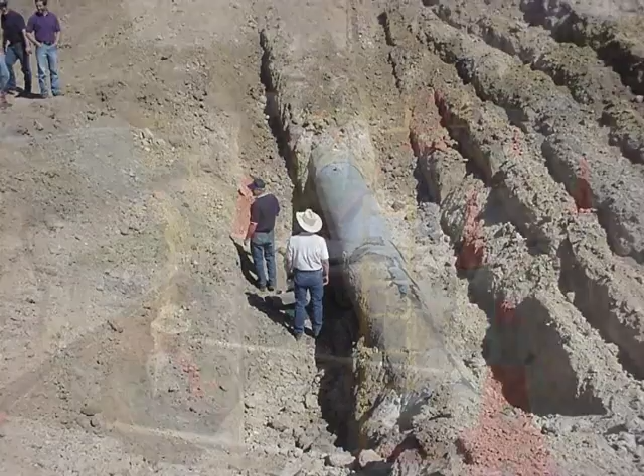External corrosion is the second leading threat to gas transmission pipeline integrity. The Code of Federal Regulations, Title 49, Part 192, contains provisions for ensuring that buried pipelines are protected against corrosion. These criteria have worked well over the years, as evidenced by the very low rate of incidents caused by corrosion.

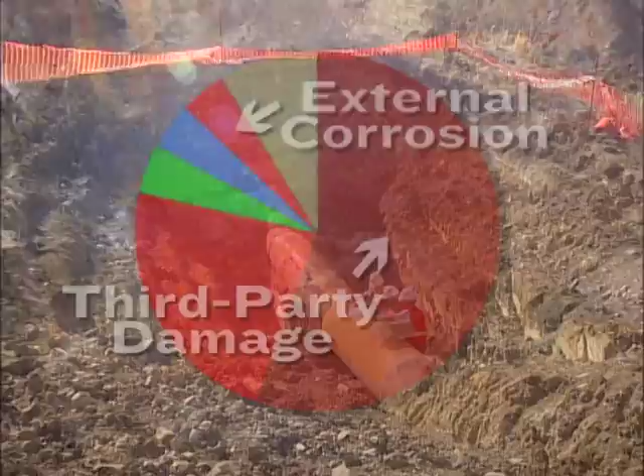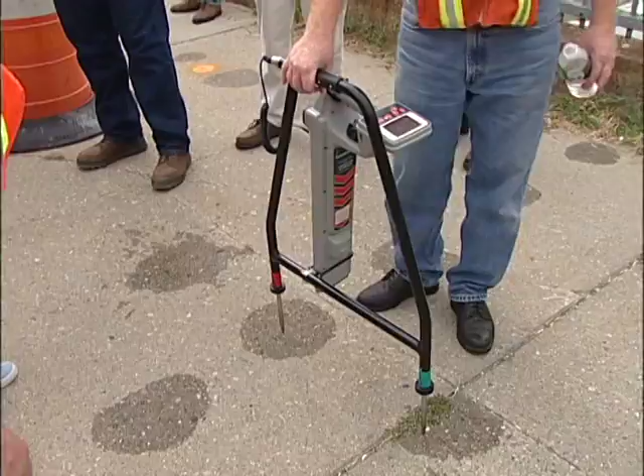In the early 80s, many pipeline operators began supplementing the minimum code-required corrosion control monitoring provisions with additional external corrosion testing, such as close interval survey. Additional corrosion testing methods, such as voltage gradient and attenuation survey techniques, were developed in the 80s and 90s.

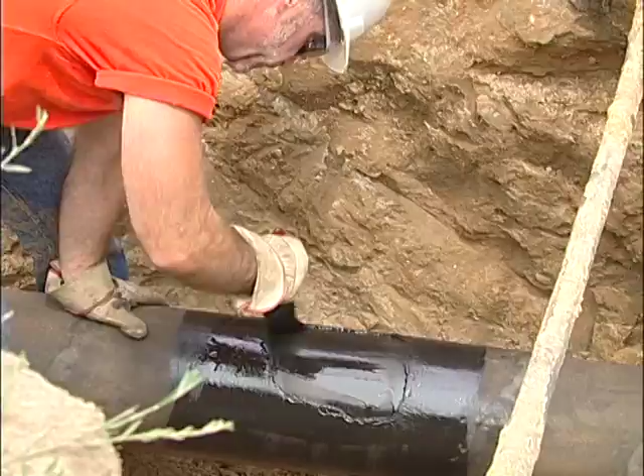Since external corrosion protection of a buried pipeline is primarily dependent on a good coating as the first line of defense and cathodic protection as the second line of defense, most of the testing was designed to locate coating flaws and determine the adequacy of cathodic protection.

Recently, these corrosion testing methods were integrated into a comprehensive engineering-based process called External Corrosion Direct Assessment, or ECDA. The ECDA process is comprised of 4 key steps: pre-assessment, indirect inspection, direct examination, and post-assessment. Industry experts worked together to develop the process.

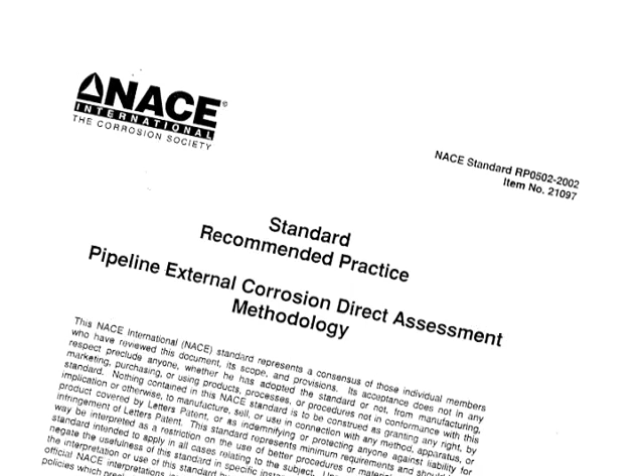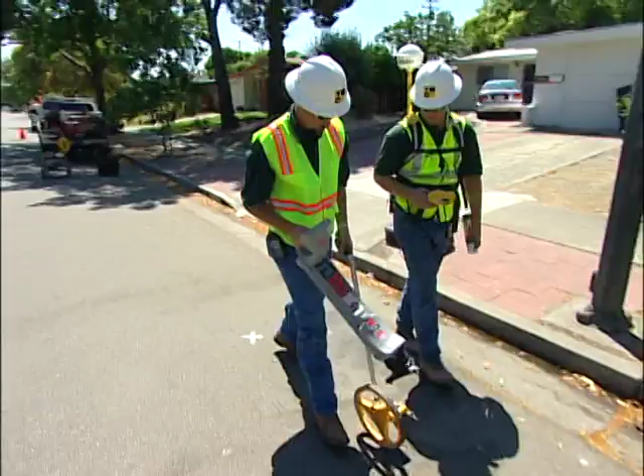The National Association of Corrosion Engineers, or NACE, led this charge and established RP 0502 as the recommended practice for performing ECDA. The process involves using engineering analysis, indirect and direct examination, and post-assessment evaluation and process improvement to investigate and confirm the integrity of the pipeline.

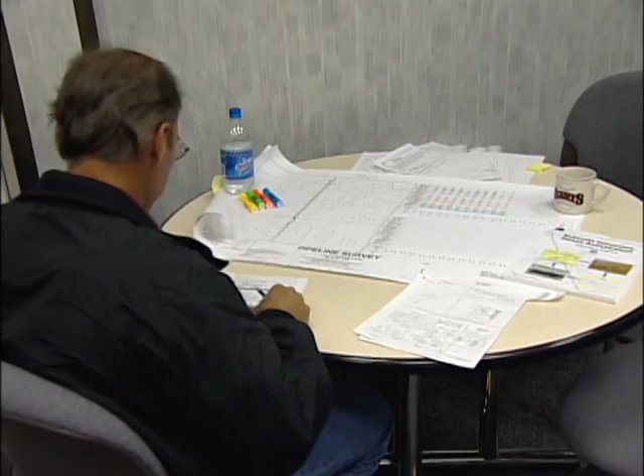In the pre-assessment step, historic and current data are collected and evaluated to determine if ECDA is feasible. Once feasibility is established, appropriate indirect inspection methods are selected and ECDA study regions are defined. Data that are researched and collected include pipe-related specifications, construction-related information, soils and environmental information, corrosion control data, and operational data. It is extremely important that all efforts are exhausted to gather all available data for the pipeline.

Some companies have advanced GIS and work management systems that electronically house many of the data elements. Other companies rely on paper mapping systems, inspection reports, and maintenance records as a primary source for the data. And don't forget the ever-important field visit and interview of the people that have been primarily responsible for the maintenance and operations of the pipeline. Many times there is no replacement for first-hand field knowledge of the pipeline and its history.

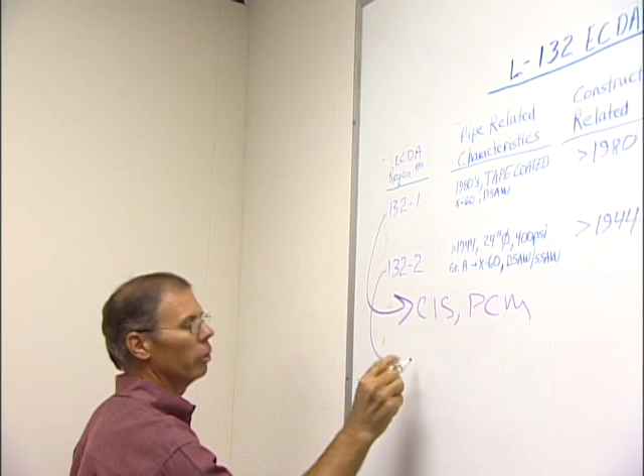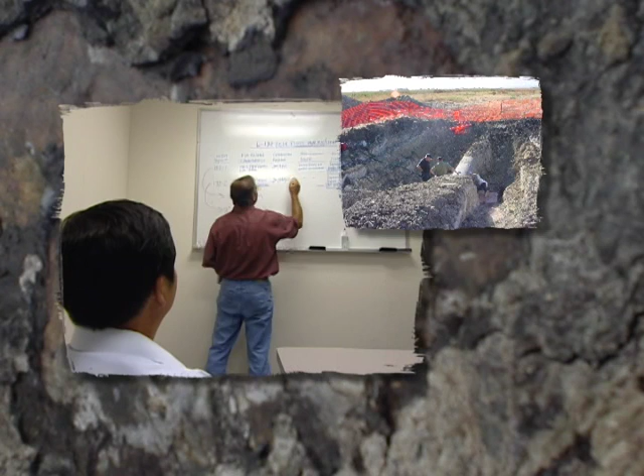After feasibility is established and indirect examination methods are selected, ECDA regions are established. Regions are areas of the pipeline that are expected to have similar past corrosion histories and future corrosion conditions. Pipeline segments put into the same region can be tested and evaluated as a single study area, even though they are not physically contiguous. An example of 2 different regions could be a 50-year-old asphalt-coated line versus a 5-year-old tape-coated line in the same environment.

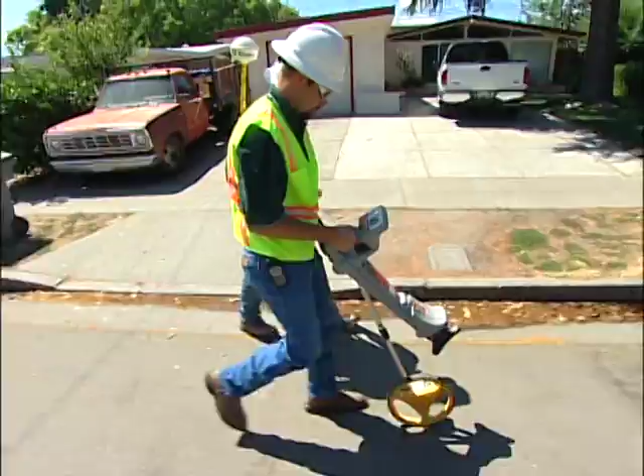The indirect inspection step involves performing the above-ground tests to identify the location of coating flaws or coating degradation, determine the adequacy of cathodic protection, and determine the corrosivity of the environment around the pipeline. Other information, such as pipe depth, may also be gathered if deemed appropriate. A minimum of 2 indirect inspection tools that complement one another are used over the entire ECDA region.

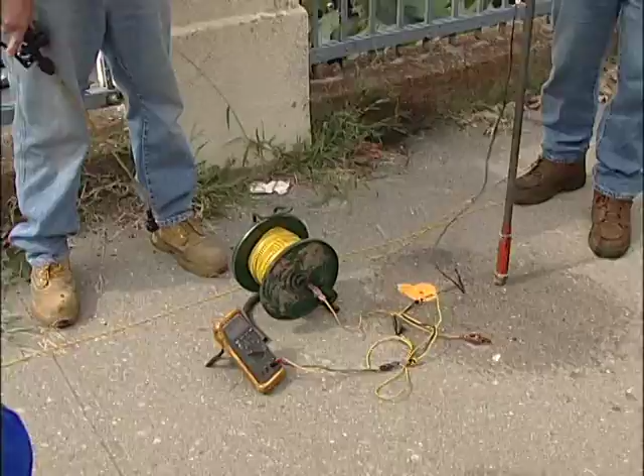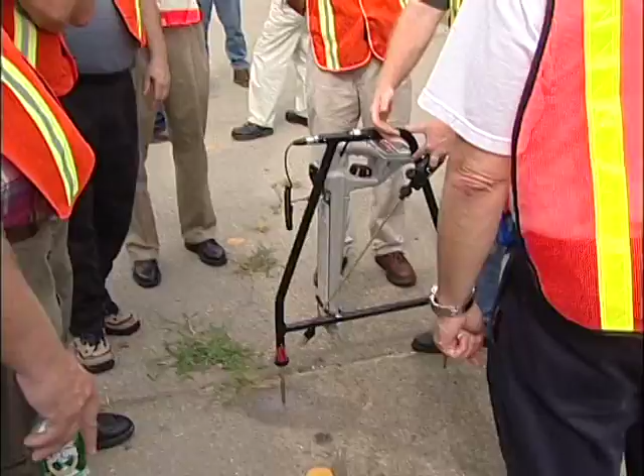Examples of test methods that are designed to detect coating flaws and degradation include the Pipeline Current Mapper, or PCM, the Direct Current Voltage Gradient Technique, or DCVG, and the Alternating Current Voltage Gradient Technique, or ACVG. The PCM determines the condition of the coating by looking for attenuation characteristics of an externally applied low-voltage AC signal on the pipeline. The PCM is also used to accurately mark and locate the pipeline.

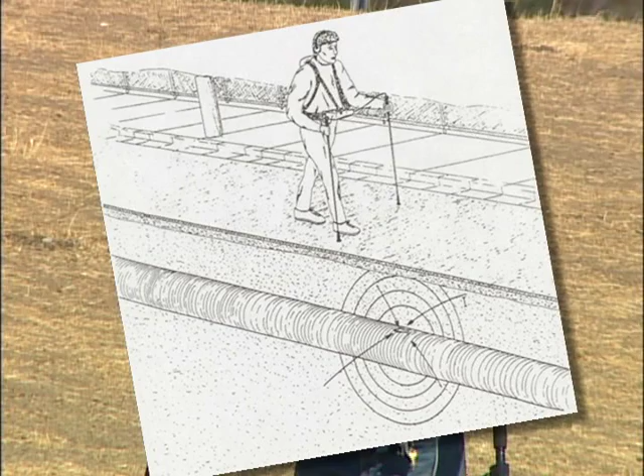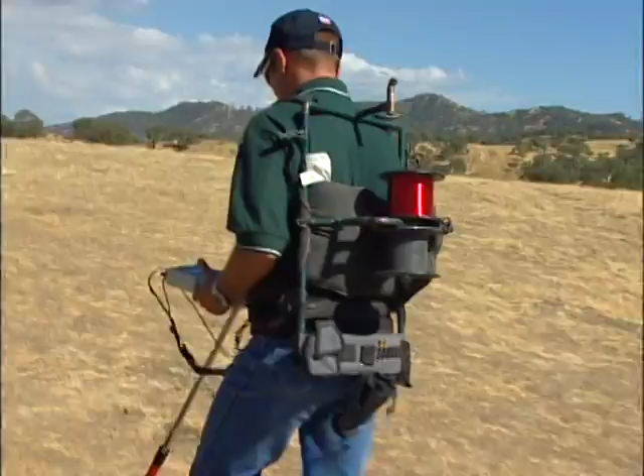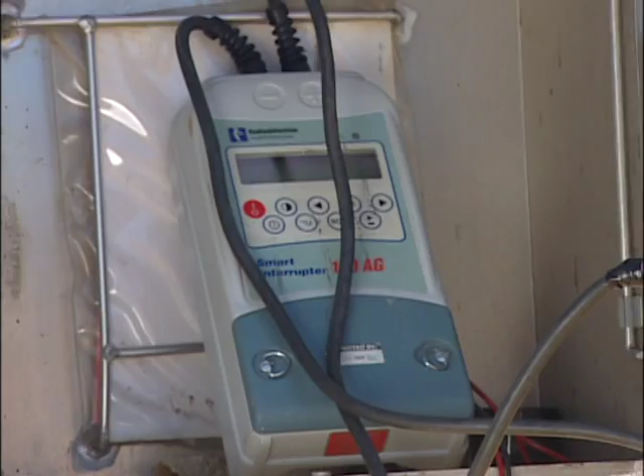Both the DCVG and the ACVG techniques detect coating faults by tracking voltage gradients created by CP current accumulating at the pipe surface at coating anomalies. To determine the level of cathodic protection, the Close Interval Pipe-to-Soil Potential Survey Technique, or CIS, is used. CIS is accomplished by measuring pipe-to-soil voltages, or potentials, at close intervals along the pipeline. On rectified systems, the testing is performed while synchronously interrupting the CP current sources.

The corrosivity of the soil around the pipeline can be determined using other techniques, such as the Wenner 4-pin method. To ensure that the data collected in the field can be accurately located for subsequent evaluation and potential excavation, many companies use Global Positioning System equipment, GPS, with sub-meter accuracy.

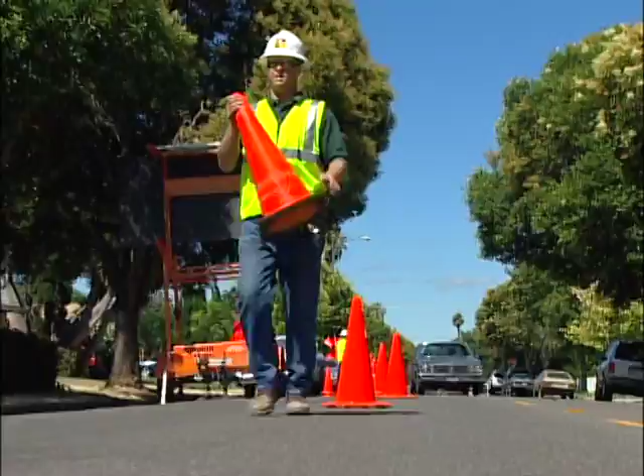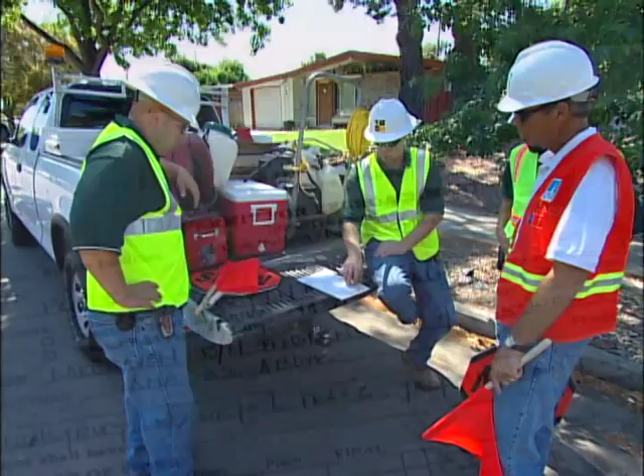For a pipeline that is buried in an unimproved right-of-way, the testing can be relatively easy to accomplish. However, growth has closed in on our pipelines, and testing pipelines that are located in city streets is more complicated. For example, performing CIS in city streets may require traffic control and drilling small holes in the pavement to establish soil contact. Local public agencies have comprehensive permitting requirements for this kind of work.

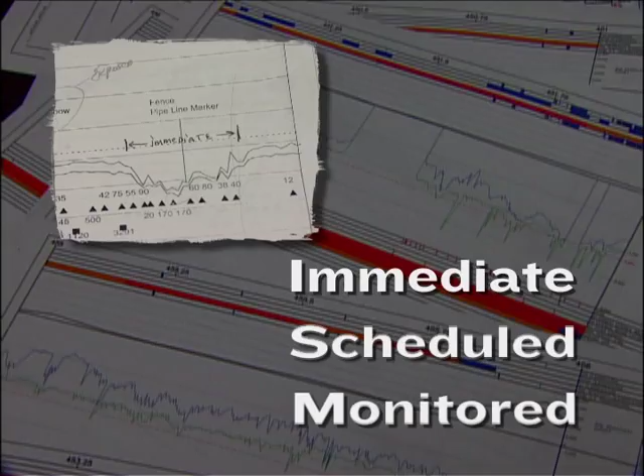Once the data is collected, potential deficiencies are classified as either a severe, moderate, or minor indication of a condition. The data is then integrated together with all the data collected, and priorities are established for direct examination. Indications are prioritized as either immediate, scheduled, or monitored. Immediate indications represent conditions where corrosion may be present. All immediate indications require direct examination.

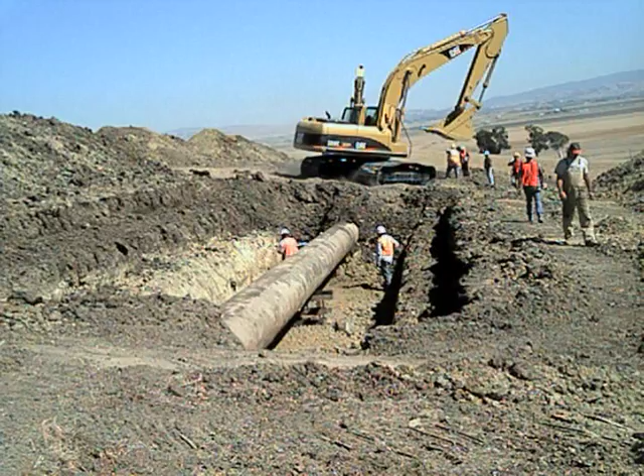Scheduled indications are of lesser concern, however, could still represent conditions where corrosion may be present or may occur at some point in the future. As a minimum, one scheduled indication must be directly examined. Monitored indications are those that have the lowest likelihood of experiencing corrosion activity and are monitored for review during future assessments.

The direct examination step involves performing the prescribed amount of direct examinations of the pipeline, documenting the condition of the coating and the pipe steel, performing any required remaining strength calculations, making any necessary repairs to the coating or the pipe, and performing a root cause analysis of the findings. Once this step is completed, the initial prioritization of the indications can be adjusted appropriately, and all actions required to complete the verification of the pipeline integrity can be established.

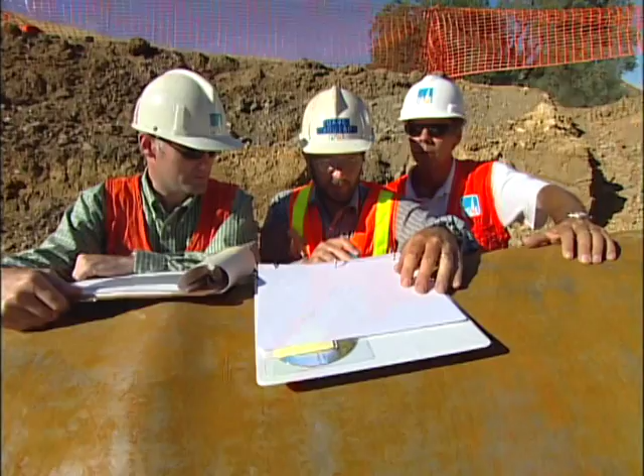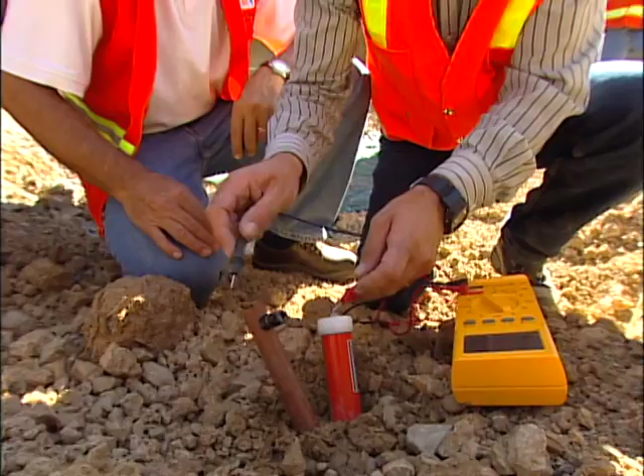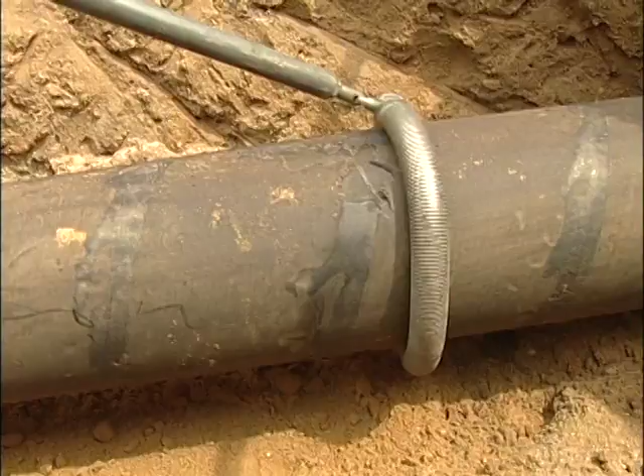When directly examining the pipe, a comprehensive evaluation of the as-found conditions is performed. There are many test methods that can be used to assist in the examination, depending on the level of coating quality and pipe integrity found. Here are some examples of the tests that can be performed. Soil analysis, resistivity, and soil pH testing, pH testing of any liquid underneath the coating, complete coating characterization, including using a high-voltage coating flaw detector and testing the coating thickness and adhesion strength, performing pipe-to-soil potential reads at the pipe depth,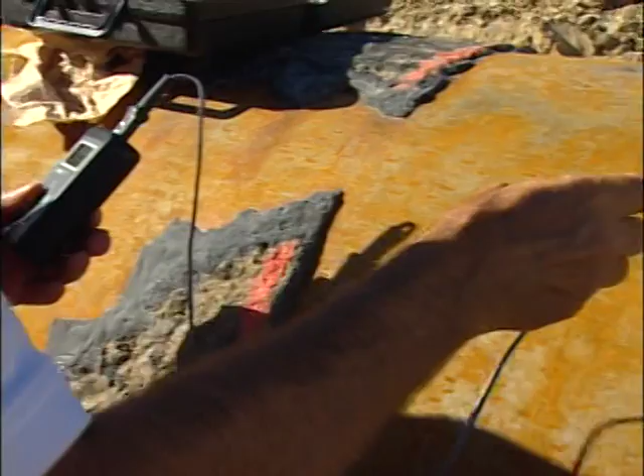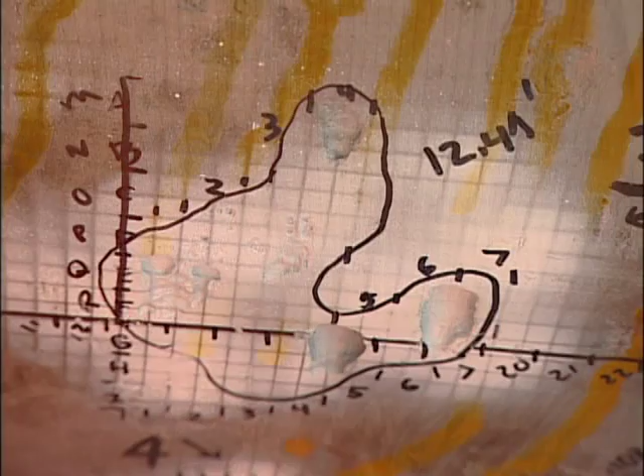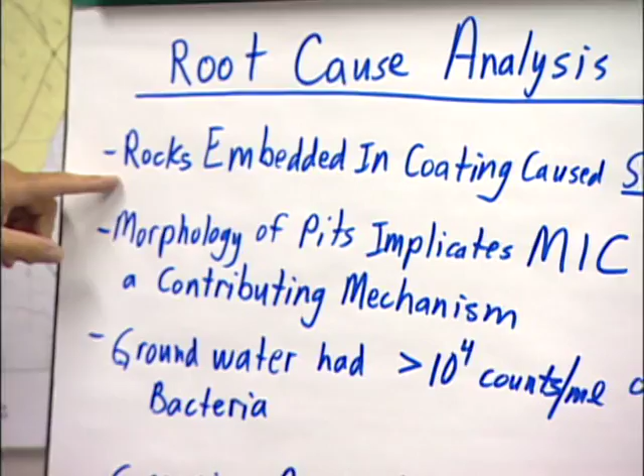analyzing any corrosion products found, including testing for microbiological influence, testing the pipe using magnetic particle testing, ultrasonic testing, and possibly even radiographic testing. If corrosion is found, detailed maps of the corroded area are made to assist in remaining strength calculations. Once all the as-found data are collected and evaluated, the results are combined with other pre-assessment and indirect inspection data to help the engineer understand the root cause of any conditions or integrity concerns that are present. The root cause analysis helps to solidify the past conditions the pipeline has been exposed to, its present condition, and what needs to be done to ensure its integrity for the future.

The post-assessment step involves analyses of all the data collected from the previous 3 steps to assess the effectiveness of the ECDA process and determine reassessment intervals. This important step involves putting 2 and 2 together and seeing if it truly equals 4. It's the step in the process that sanity checks everything gathered, postulated, and found, and from a critical perspective, establishes the next direction to be taken for the pipeline under study.

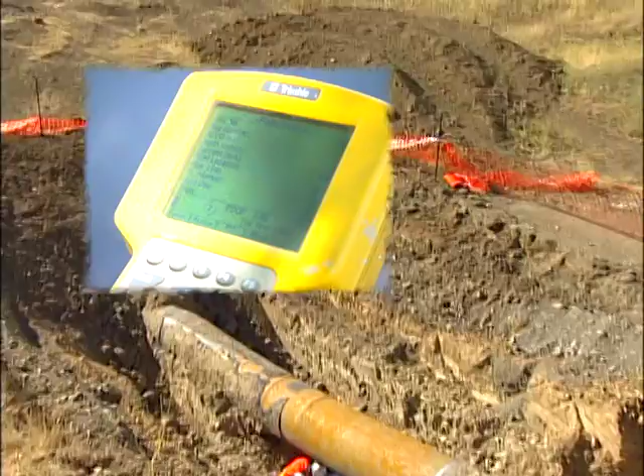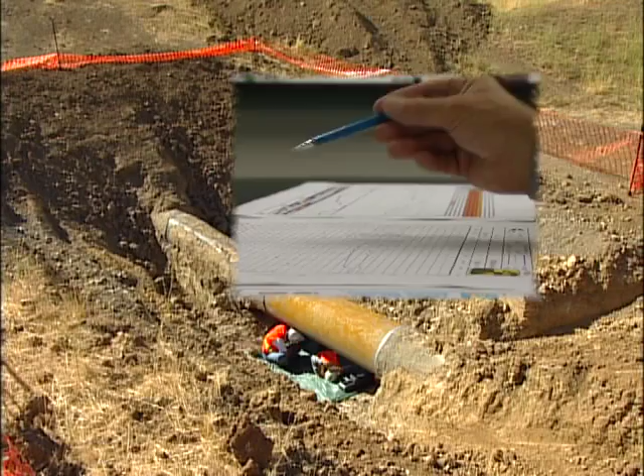ECDA has grown from its roots of informally applying technically sound inspection practices to find corrosion on the pipeline to a mature, formal, and comprehensive integrity verification process. The ECDA process will no doubt change and improve as new techniques for data gathering, analysis, and testing emerge. The pipeline's history, current condition, and assessed future condition are all used to accomplish the very important task of ensuring the integrity of the pipeline so that we can ensure the safety of everything and everyone around it.